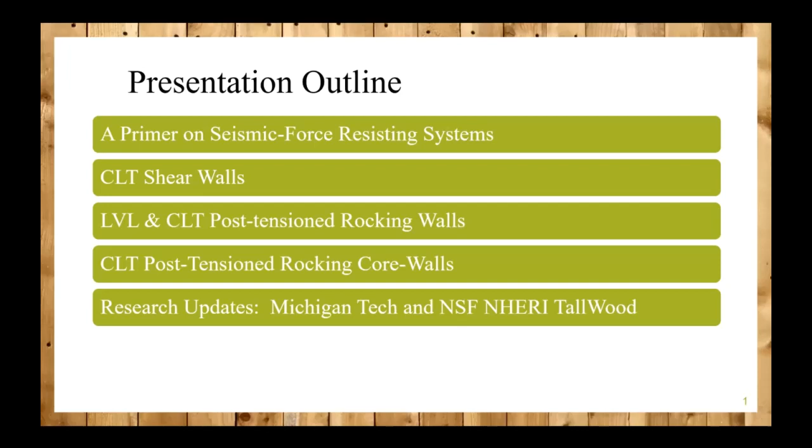The one thing I want to quickly note is that essentially this information I'm going to present, other than the latter part, is a literature review of select research studies in the past 10 years or so in this field. So I'm going to be presenting work by others, and all the figures and data are taken directly from those studies.

As structural engineers, we need to design buildings for both gravity loads, which are vertical loads such as self-weight and live load, but we also need to design the building for lateral loads, which are wind and seismic loads.

To resist wind and earthquake loads, all buildings have to put in these lateral force resisting systems. Here the focus is designing for earthquakes, so we refer to these systems as seismic force resisting systems, although they resist wind loads too, and vice versa. For whatever reason, the code switched to calling these seismic force resisting systems and wind force resisting systems separately, but it's the same frame.

The main difference is that lateral force resisting systems are designed to remain essentially elastic, or with very little damage, for wind loads. But when it comes to designing for earthquakes, we design our systems for inelastic response or controlled damage.

If you take a look at the figure on the right, this I believe is the Kobe earthquake in the early 1990s, and what you see there is a building that's essentially on the verge of collapse. I think most people who aren't necessarily structural engineers don't really realize that this is a code compliant building in terms of designing for earthquakes.

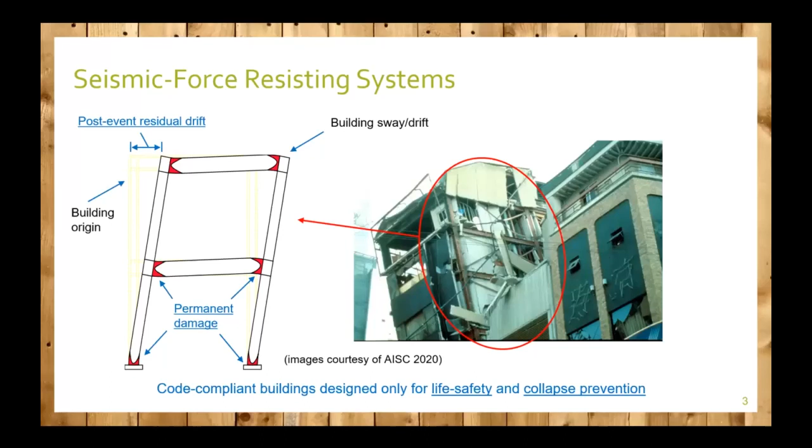The analogy that I really like to use is the crumple zone analogy for vehicles. All vehicles are designed with crumple zones, so if you're in a car accident, the body of the car dissipates all the energy through damage, so that way you can walk away from that accident. This car represents a building.

I'm showing the pre-earthquake condition, right? The earthquake comes along, and in this case I'm using a car analogy for a car accident, and you can see the damage that occurs. You can see the passenger in the driving area looks pretty safe, I bet the people who were driving this were able to walk away safely. So this is life safety.

This is how seismic force resisting systems are conventionally designed in the current standards. As we talk about CLT systems, one of the systems is CLT shear walls I'm going to talk about, and this is what CLT shear walls are designed for, to get to the point where you get to this damaged car where people can leave.

Now there's been a surge in approach and how we design buildings in the last 10 years, which is what if we can design buildings such that we can easily repair them, that they're no longer disposable, that after the event the building will recenter on its own and we can easily repair the damage. This is where seismically resilient seismic force resisting systems come into play, and this is related to CLT post-tension rocking walls that I'll talk about.

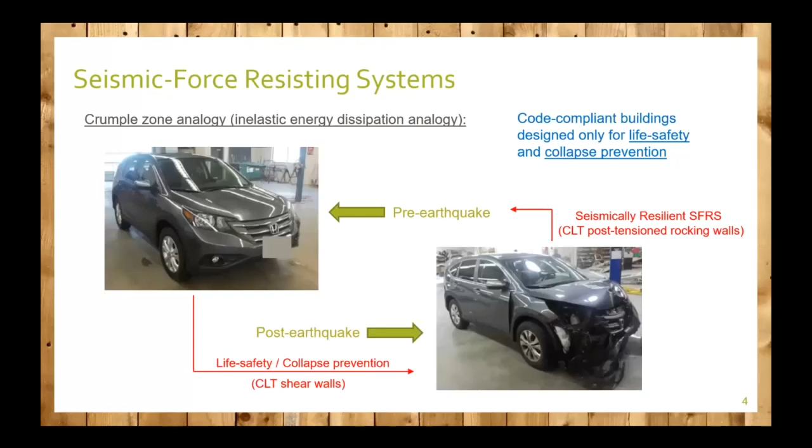So a little bit more technical discussion on how we design for buildings. If we consider the generic building shown on the right, with lateral loads on it, and push on that building until collapse, the building response can be represented by a pushover curve shown in the left-hand figure. The vertical axis represents the increasing pushing force, and the horizontal axis represents the corresponding lateral building displacement.

From the pushover curve, we can extract three different parameters: the R factor, a response modification factor; C sub D, a deflection amplification factor; and omega naught, an overstrength factor. These are referred to as seismic performance factors, and to design any seismic force resisting system, these three parameters have to be known.

If you take a look at the graph, I've highlighted a portion of this pushover curve at the beginning where it's straight. This is an elastic response, meaning the building or lateral frames have not been damaged. So if you push on a building in the elastic region, the response is recoverable—it will always go back to its center. Just like a spring: you pull on it and let go, it goes back to its original position. That's elastic response.

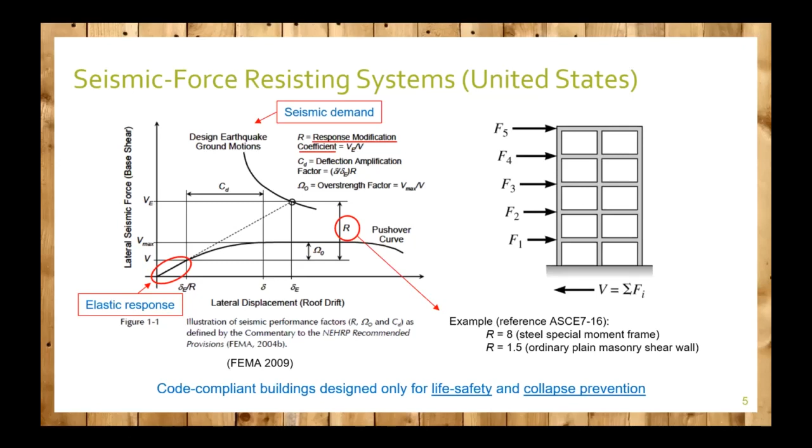Okay, I apologize for that—went a little long there, but think about this R factor, keep that in mind. So how do we calculate our forces?

The first step is to determine what the design earthquake forces are. This is typically done using the equivalent lateral force procedure prescribed in ASCE 7. This is a static force-based method that in most cases circumvents the need for conducting dynamic response history analyses, which requires running actual ground motions on numerical models, and is highly computationally intensive.

Typically, those kind of high-end analyses are for atypical structures, but even if you had that condition and had to run the nonlinear response history analysis, you still have to run an ELF to design the member forces. And the reason why I showed this is how we calculate the forces.

The base shear V equals C sub S, the seismic response coefficient, multiplied by the weight. Looking at the equation for C sub S, the S term up top is acceleration, divided by an R term. In most cases, I sub E, the importance factor, is just 1. So what's happening is you're dividing the acceleration demand by the R factor. The R factor is found in a table, and an engineer can go in there and pick these factors for a particular type of system.

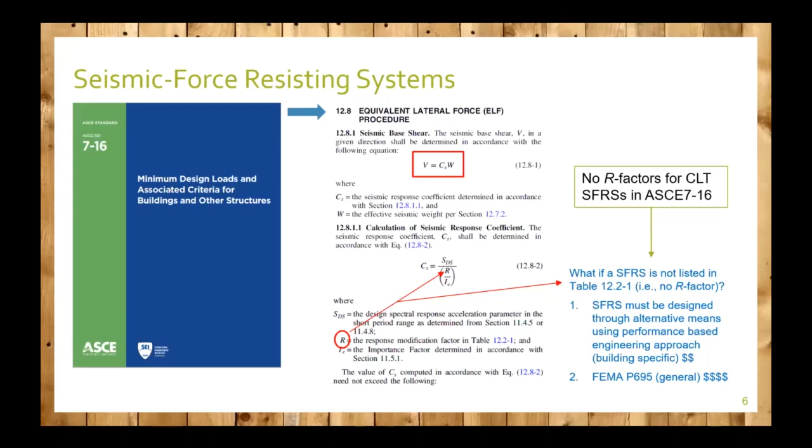So wouldn't it be great if we could have a 100% mass timber building? That's the focus of where this presentation is going: CLT shear walls.

Here's a great figure taken from a CLT panel. Basically, if you have a panel and put a lateral load on it, there are 4 distinct components that add to the total overall deformation of that wall during an earthquake. The first is rocking, where essentially the panel is a rigid block that just rocks. The second, shown in figure B, is sliding. The third and fourth are shear deformations and flexural bending deformations.

Because CLT panels are so stiff, the dominant response is rocking and sliding, and shear and bending deformations are essentially negligible. Because these panels are so rigid and stiff and strong, they essentially remain elastic if you put a lateral load on them, largely because they rock and slide while remaining rigid elements.

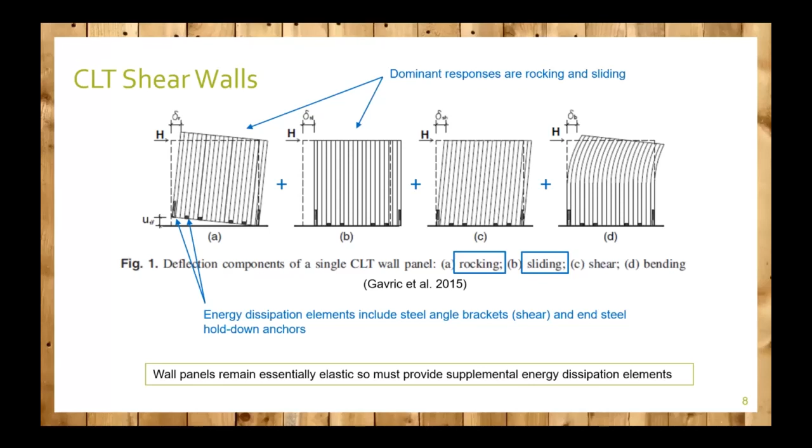So here's a video, and there we go. This shows you a test.

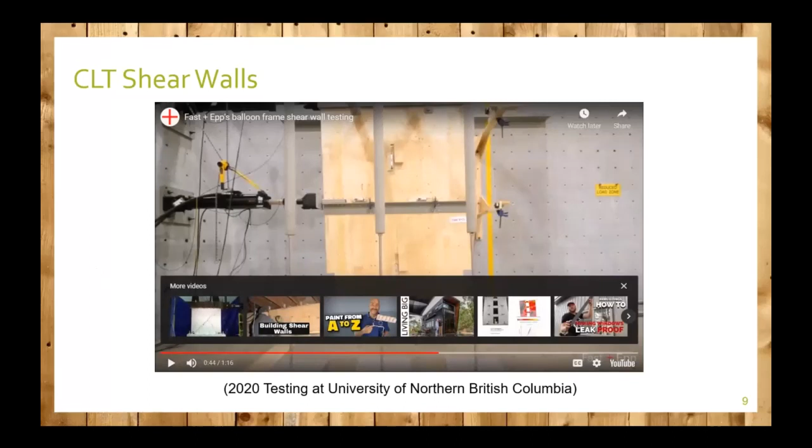This is a recent test at University of Northern British Columbia, where they're testing a two-story CLT shear wall. You can see actuators at 2 levels, and this panel is also what we call a coupled wall, meaning it's not one solid panel. There are actually 2 panels - you can see the relative sliding in between. So this is a coupled wall, with a splice in between.

What I wanted to point out is you can see the energy dissipation devices that are provided - there's the shear angles, the small ones near the middle, and there's the hold down uplift anchorages at the ends. Even though this is a CLT shear wall, you can clearly see that it's really a rocking wall, because that's what it wants to do - these walls are so stiff.

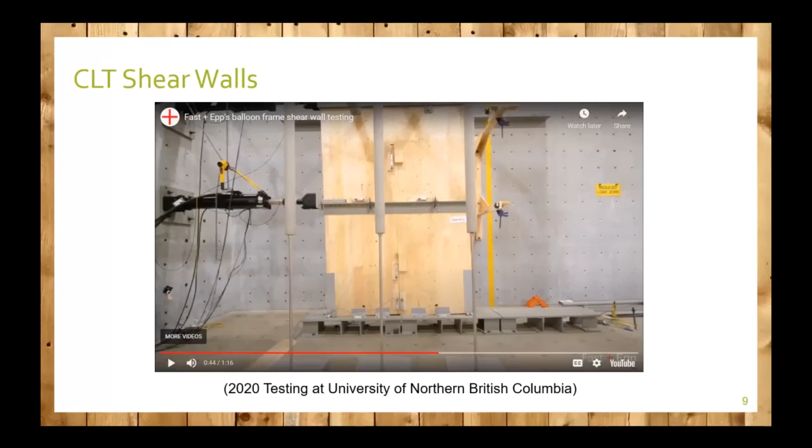Moving on to some of these studies, one of the first comprehensive testing programs of CLT shear walls in North America was conducted by FP Innovations out of Vancouver, BC. These experiments were quasi-static cyclic tests, and you can see the test setup shown there in what looks to be a Revit model.

Quasi-static simply means these are constant low velocity tests. Constant velocity meaning there are no inertial effects that would affect the force displacement data. Slow velocity meaning typically these would be conducted at a velocity of like 1 inch per minute - really slow. In the video we just saw, you could see it was sped up quite a bit to get that faster moving video.

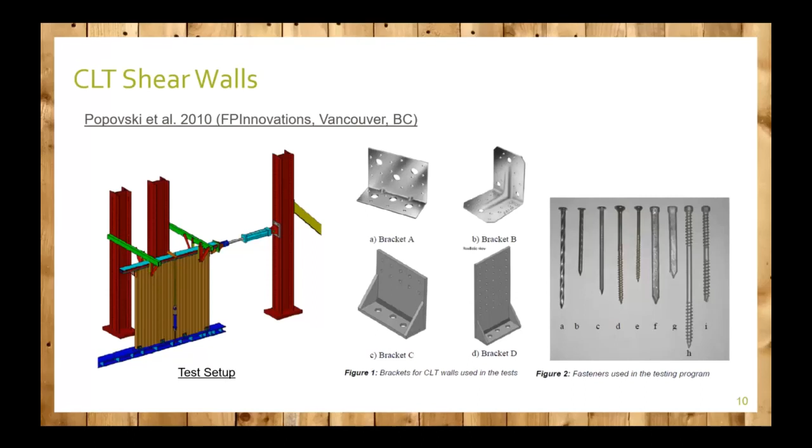So the brackets - they were investigating the brackets as one of their parameters, and they were also looking at using different fasteners. They've got some self-tapping screws, nails, and so this was the test program. Here's the test matrix that they tested.

They had 12 walls in total, with different aspect ratios. If you take a look on the left-hand side, they had 3 walls with an aspect ratio of 11.3 feet long, 7.5 feet high. So these would be squat walls.

Next to that is a table with 2 walls, which were tall walls - these would be considered slender CLT shear walls. Finally on the right-hand side, they did a series of panel tests that were square, so this would be kind of a mixed panel ratio in between squat and tall.

You can see that they had different fasteners, used different quasi-static loading protocols, and if you look at some of the test panels - for example on the far left-hand side, the middle one, IX number 9 - you can see these vertical stripes.

Those are splices. So similar to the video we just watched, this particular panel consists of 3 different panels spliced together with a spline. So really, that test specimen IX is really a slender wall, because the individual walls don't work compositely - they actually work independent of each other.

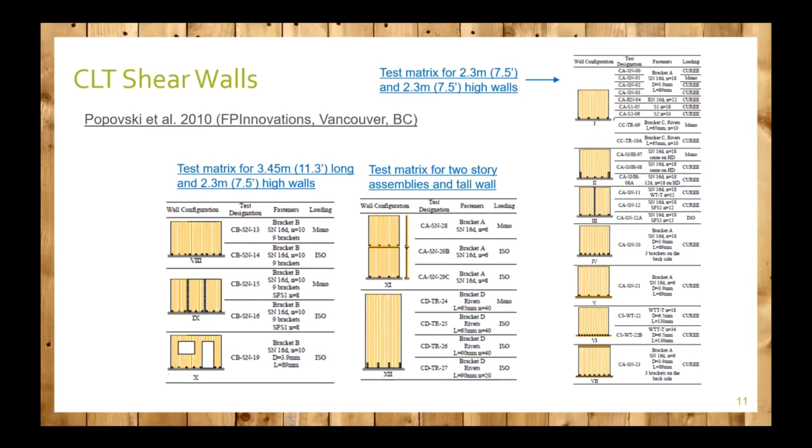They also had different combinations of shear brackets and hold down anchors. Here's some results from some of their tests, and I selected 2 tests. The first one on the left-hand side is a square panel, using 4 of those bracket type A's.

You can see the damage modes of these angles shown in figure 8. You might look at that and say, whoa, that looks terrible - so much damage - but that's what we want, and that's how we want those angles to behave. Energy dissipation is caused by yielding controlled damage of those angles and yielding and pull out of the nails - that's where all the energy dissipation is coming from. There's some minor energy contribution from the wall, some crushing at the toes and things like that, but that's insignificant compared to energy dissipation provided by these yielding elements.

If you take a look at that force displacement response, you can notice that it kind of pinches - meaning towards the 0,0 point on the plot, it actually pinches, looks like a bow tie, I guess. But this response is actually characteristic of a rocking response.

A rocking response is actually a natural self-centering mechanism. If you think about old Greek structures, the big columns and pillars, they're still standing today, even with the high seismicity over there. So why are they still standing? Well, in part, largely it has to do because those columns are not fixed to the ground - they're allowed to rock, and if something rocks, it'll naturally want to self-center under its own weight.

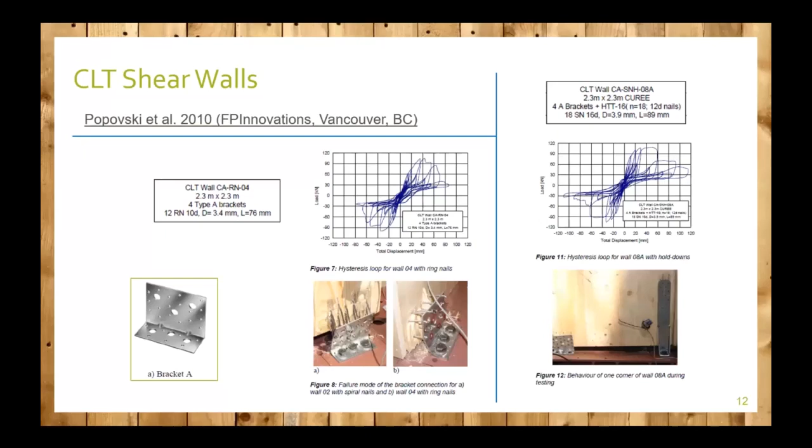So that's what you're seeing here is there's a bit of a pinching effect due to rocking, which is a natural self-centering. And then on the right-hand side, it's essentially the same wall panel, but they used hold downs on the ends. You can see on the uplift as the wall is rocking, there's some additional energy dissipation and strength provided by those hold downs at the ends.

Another comprehensive CLT shear wall testing program was conducted by Gavric et al. in 2015, a study by researchers in Italy. Their setup was pretty similar to what we just saw with FP Innovations, using similar shear angle brackets, but they're using different hold downs and some different fasteners, self-tapping screws and fully threaded screws.

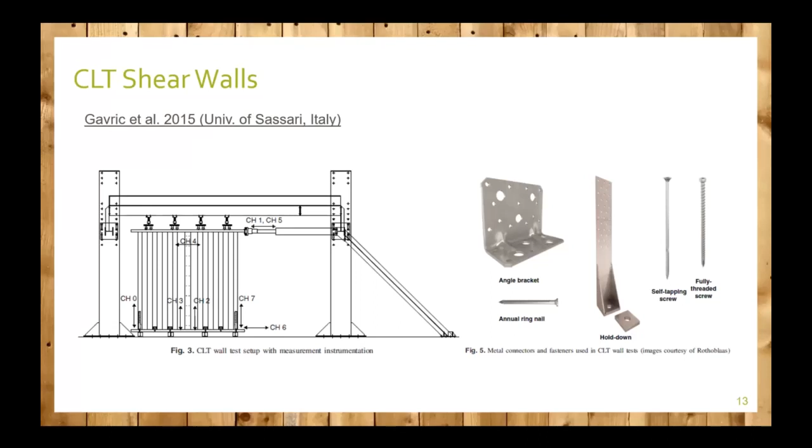Here's their test matrix on the right-hand side. The wall panels are single wall panels, shown on the left. The first one is a single wall panel. The second one is a coupled wall—even though it looks like a single wall, it's actually two walls tied together with a half lap joint, as shown there. The third one is also a coupled wall system, but instead of using the half lap joint, they're using a spline joint, an LVL strip of wood nailed.

One of the big differences in this testing program is they included vertical load on their loading. So not only are they pushing it laterally with an actuator, they're also simulating some gravity load on it. The number of hold downs changed, while the number of angle brackets remained constant except for the very first test, which had 2 versus 4. The number of screws in the vertical joints also varied, and you can see that information there.

What I want to point out before moving to the next slide is that very first test, I.1, had 2 angle brackets, whereas everywhere else there's 4. So just make a note of that as we go to this next slide.

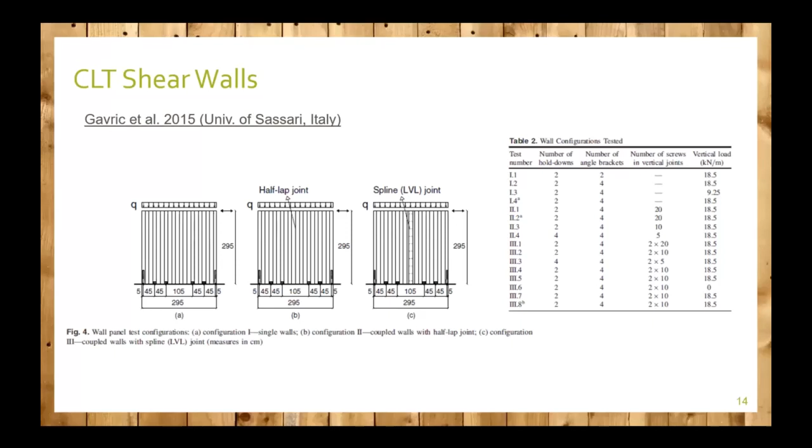So here's some results. These researchers, and I really appreciated what they did, in table 4 for each test, quantified the deformation from the different components of deformation shown in that slide I presented earlier—there's a rocking component, sliding, and shear and bending.

If you look at that very first test, on the far right-hand side they have the type of kinematic behavior. The first test was essentially sliding dominated. You can see the photos on the left-hand side in figure 7A, showing that arrow indicating literally how far that wall slid. I think that largely had to do with an inadequate number of angles—this was their first test. After that, they realized they needed to add more shear angles, so they went to 4 on each wall.

Moving on, depending on the predominant deformation shown on the far right side, the first one was driven by sliding, then there was rocking and sliding, and the latter specimens were all dominated by rocking. That's expected because those were coupled walls, meaning the individual walls that make up the full panel are very slender and tend to rock. Looking at the percentages under rocking and sliding columns, for example the very last test, 3.8, 90% of the deformation came from rocking, 9.4% from sliding, and 1.4% attributed to shear and bending deformation. Shear and bending deformation across all columns is essentially negligible.

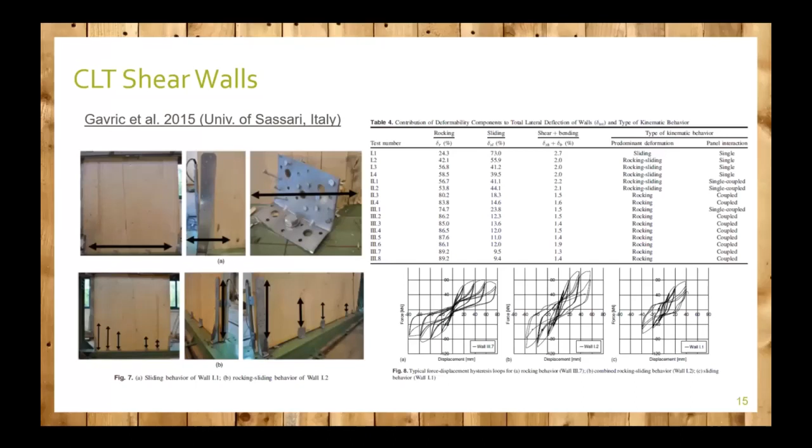Perhaps one of the most well-known CLT shear wall testing programs is the 7-story full-scale shake table test of the SOFIE project. This was an Italy-Japan collaboration, and they had a bunch of quasi-static sub-assemblage tests within the SOFIE project.

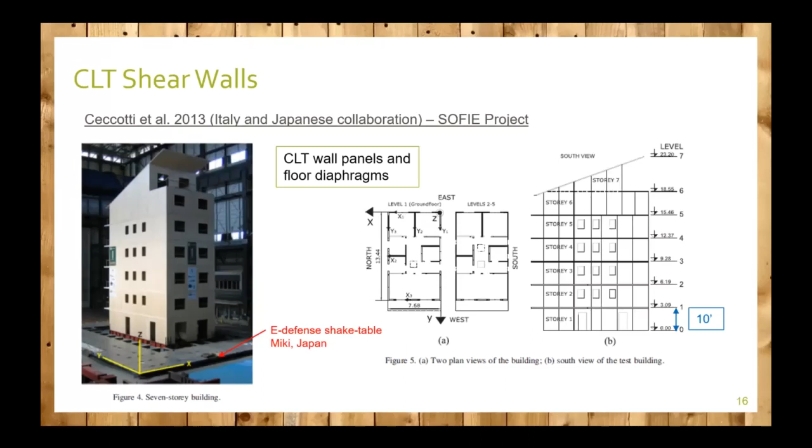They finished it off with this benchmark test done at E-Defense Shake Table, the largest shake table in the world in Japan. This was a full-scale, I guess you could call it a 7-story building, and it's all CLT - CLT wall panels, CLT diaphragms, CLT interior walls. You can see the plans on the right-hand side. Story floor levels were about 10 feet high, and they used typical hold-down connections. Wall-to-wall panels used self-tapping screws - this is common CLT construction.

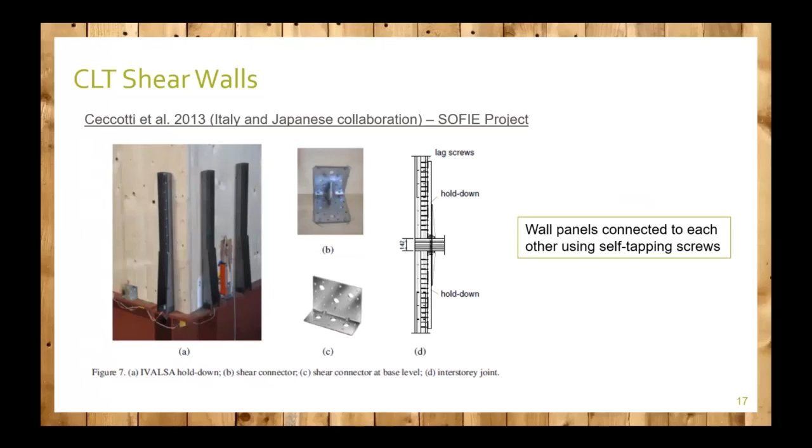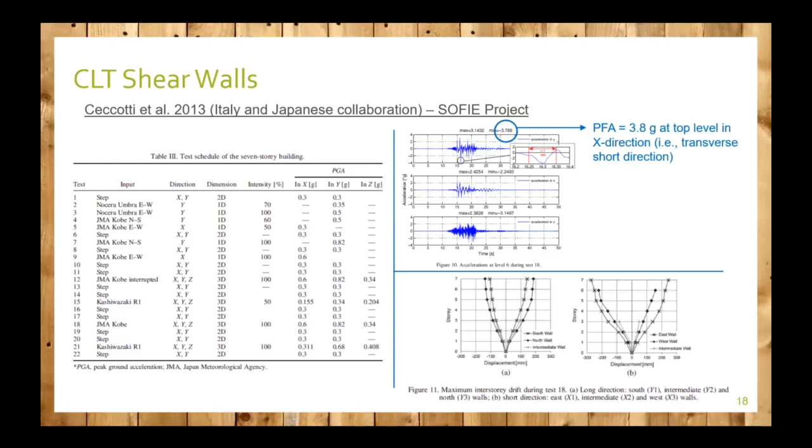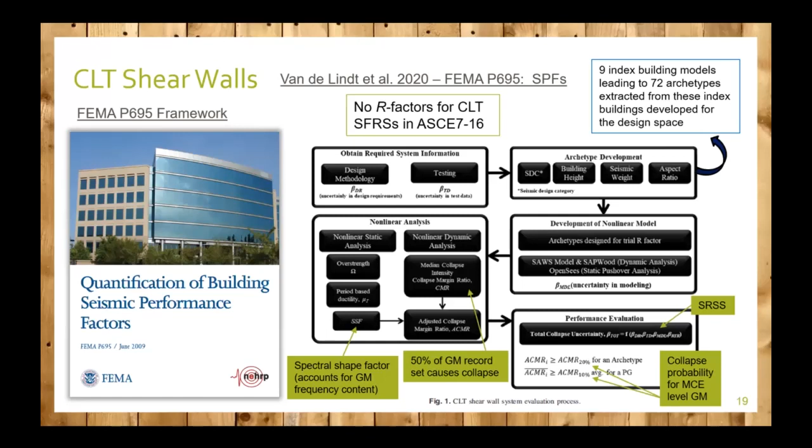I see I'm getting close to ending, so the point being is they had 72 archetype buildings. They ran nonlinear simulations and determined, through a probabilistic framework, what these R factors are.

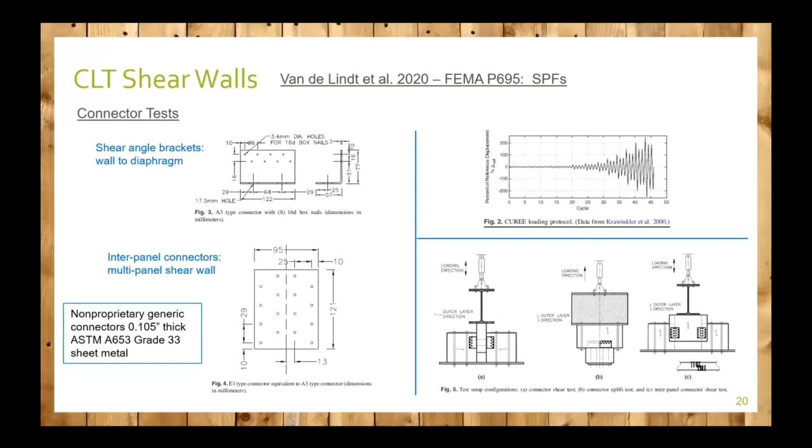As part of the P695 testing, they have to calibrate the numerical models. They did that by doing connector tests - on the shear angle brackets, and on the lower right-hand side, uplift connector shear tests. They did in-plane shear tests of the connector, and then inter-panel connector shear tests. They did these along with panel tests on many different parameters, in order to calibrate the numerical models before running all the numerical simulations.

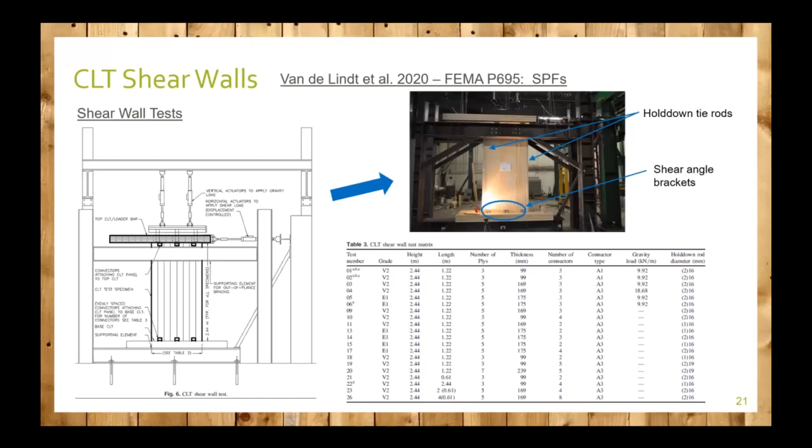The big takeaway here is that they used hold-down tie rods instead of hold-downs at the ends for uplift, and they used these shear angle brackets.

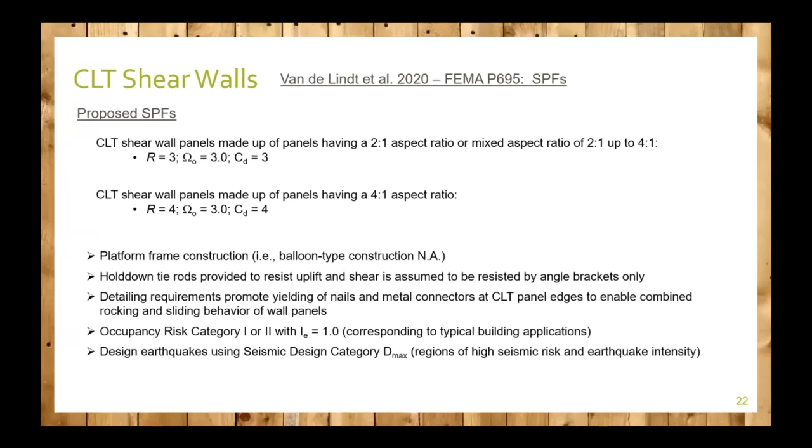These SPFs were developed for high seismic regions, or seismic design category D-max, the regions of high seismic risk - which means for regions of low seismic risk, you can use these systems because they envelope the response using the worst case seismic hazard level. These proposed SPFs are expected to be included in ASCE 7-22, available sometime next summer. It's expected that IBC 2024, the International Building Code, will include these by reference to ASCE 7-22.

The design requirements for strength, stiffness, and details are to be in the American Wood Council Special Design Provisions for Wind and Seismic document, the 2021 document, which will be referenced in the IBC 2021. This references the current ASCE 7. So for jurisdictions using the 2021 IBC and the SDPWS 2021, officially the SPFs are not available. However, it's likely that local building jurisdictions will allow the use of ASCE 7-22 as soon as it becomes available, so people can implement CLT shear wall systems.

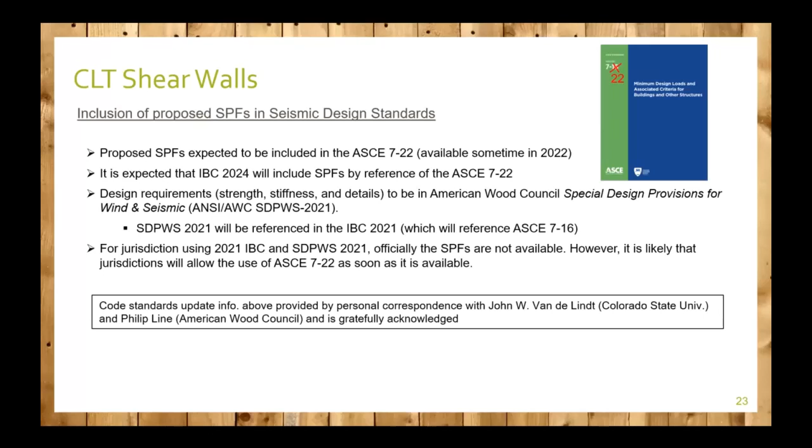Now we're moving to rocking wall systems. These, as I mentioned earlier, are seismically resilient systems for the reasons I noted earlier. The only difference is that we have our CLT wall, we add post-tensioning, we eliminate the hold-downs and the angled shear brackets, and we provide some sort of idealized roller support, but provide some sort of horizontal restraint there to resist the base shear. This leverages the natural kinematics of the CLT wall, so we're allowing the wall to rock freely.

So we have to provide supplemental energy dissipating elements, and we do that by providing what we call structural fuses. Because this system is decoupled from the gravity framing system, we can easily go in and repair these structural fuses. When I say decoupled, I mean that if you take these walls out of a building, the building can still support its gravity loads. It's still stable, it's decoupled. So this provides an opportunity to provide a system that can recenter, with energy dissipating elements that are easily replaceable.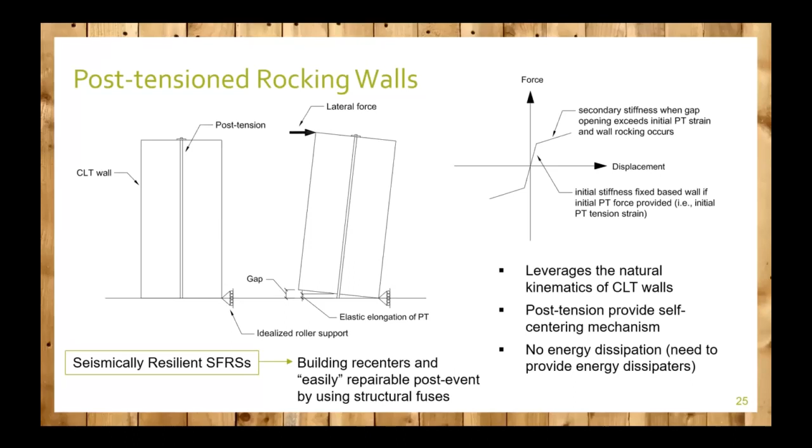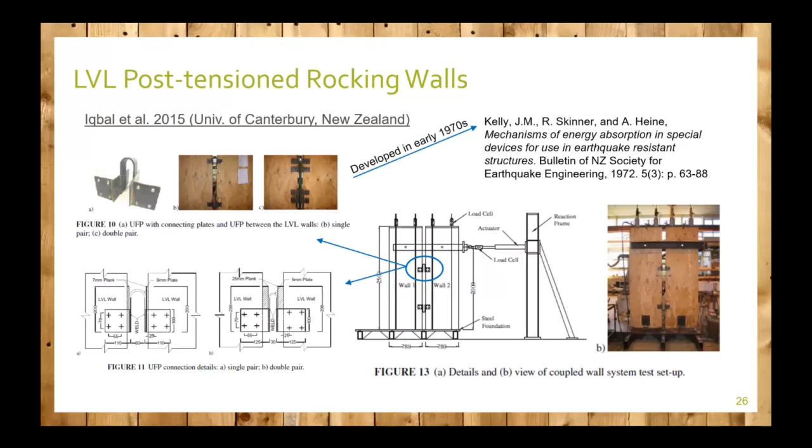So here are some studies, a lot of these came out of New Zealand. Here's a coupled rocking wall, and you can see on the figure on the right-hand side the post-tensioning. The energy dissipation they selected to use are these U-flexural plates, called UFPs. As the wall rocks, these U plates deform in bending as the walls move along their adjacent planes. I have to note that these UFPs were developed in the 1970s, so they've been resurrected, so to speak, in these rocking wall systems.

So for this system, the loading protocol is shown on the left. They did both quasi-static testing, that's the sawtooth sine displacement you see, and they also did pseudodynamic testing. You can see the ground motions they use, which is basically emulating a closed loop system where they're solving the equations of motion, emulating a dynamic shake table test in a quasi-static fashion. So they had different parameters.

They're looking at different recentering ratios on the far right-hand side. You can see that's all dependent on how much restoring force the PT provides compared to how much inelastic energy dissipation is provided by the UFPs. Anything above 1 in this particular table provides full recentering.

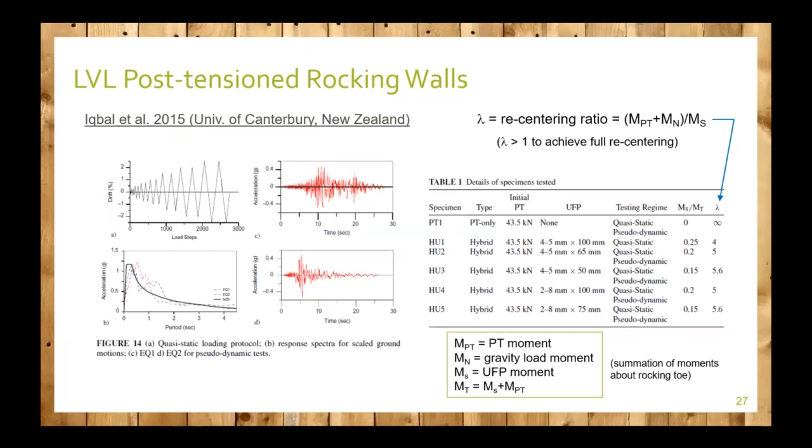So here's the response. On the left-hand side, you can see some pictures of the UFP plates in bending. The force displacement plots are shown on the right, and you can see the flag-shaped characteristic we see in recentering systems. In red, that's the wall with no UFPs, only the PT, and you can see it's bilinear elastic, with no energy dissipation.

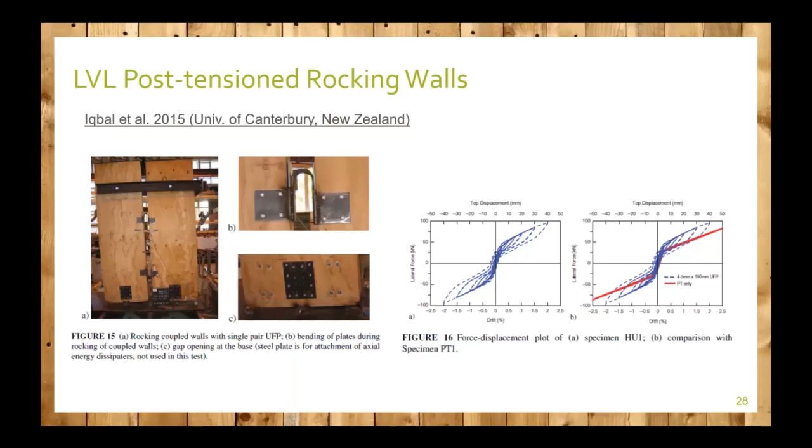Another study was conducted by Sarti in New Zealand. He used a very similar system, but instead of coupled walls, he had a single wall coupled with some boundary columns, but he's using these UFPs as well. I want to make a note of this concept - this is what the NHERI TallWood team have used for their tests.

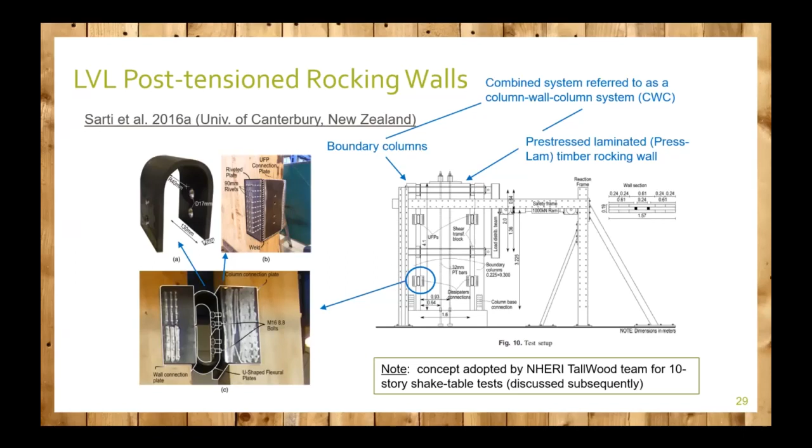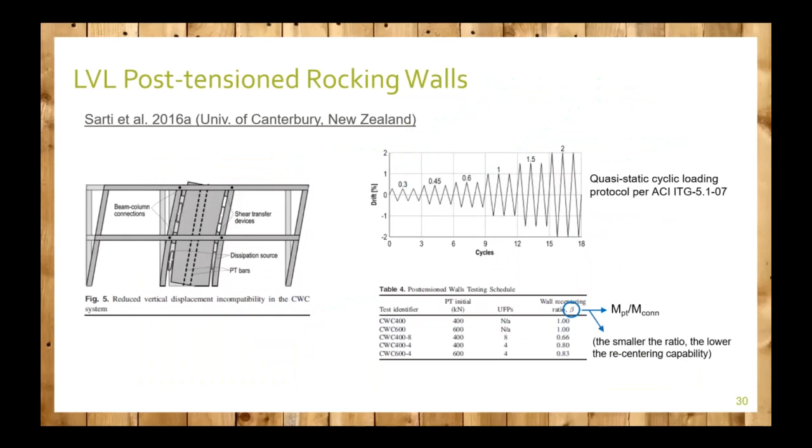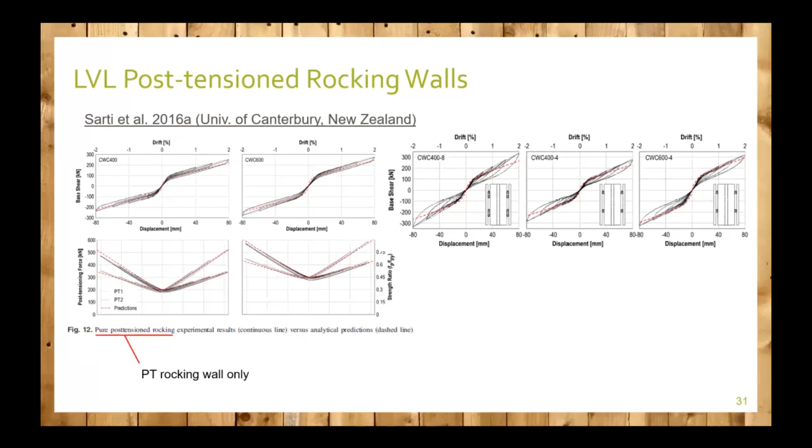There's the loading protocol, and again the testing matrix. On the far left-hand side shows the kinematic response of the system. Finally, here's some force displacement response. On the left-hand side, you see the PT only with no UFPs - you do see some hysteresis loops there, due to some wood crushing and friction. But on the right-hand side with the UFPs, you can see the larger loops, which represent energy dissipation. And of course, you can see that these systems are fully recentering.

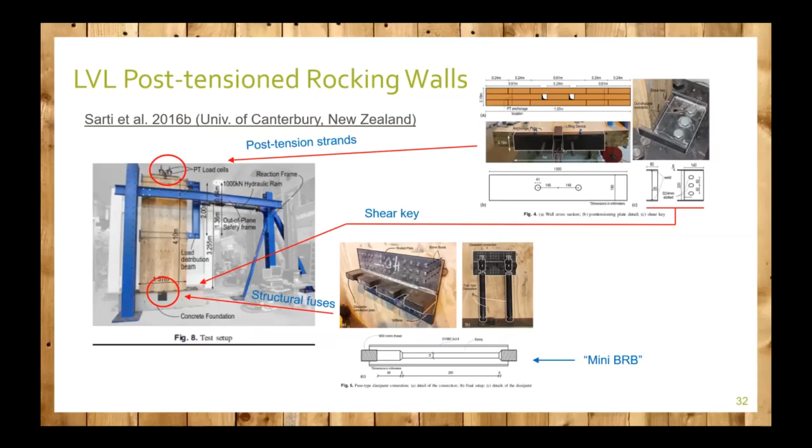Another system variation that Sarti did was, instead of using those UFPs, he had little mini BRBs at the base of the wall. As the wall rocks, these little mini yielding devices dissipate the energy. There's also a shear key in front of the walls to resist the in-plane movement of the wall.

Here are some responses, highlighted on test S400-8. Looking at that loop, it actually has not fully recentered as they were expecting, recording a residual drift of 0.6%. This had to do with the yielding elements having some overstrength due to strain hardening that wasn't accounted for. When something yields you get permanent deformation, and those BRBs prevented the wall from fully recentering. Recentering is typically assumed achieved when you have a residual drift of 0.2%.

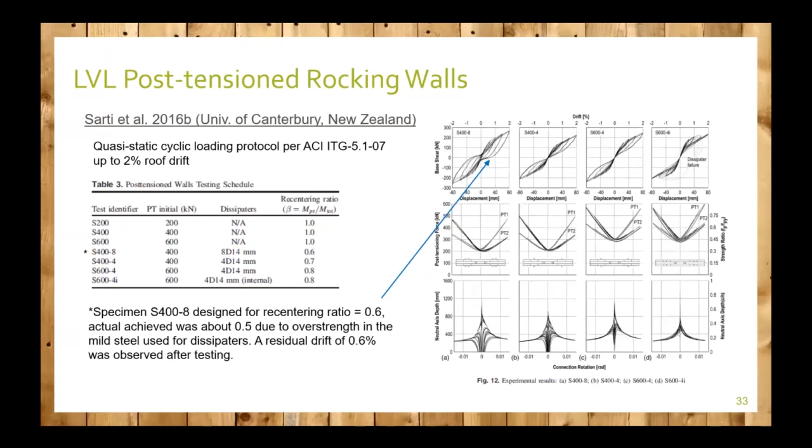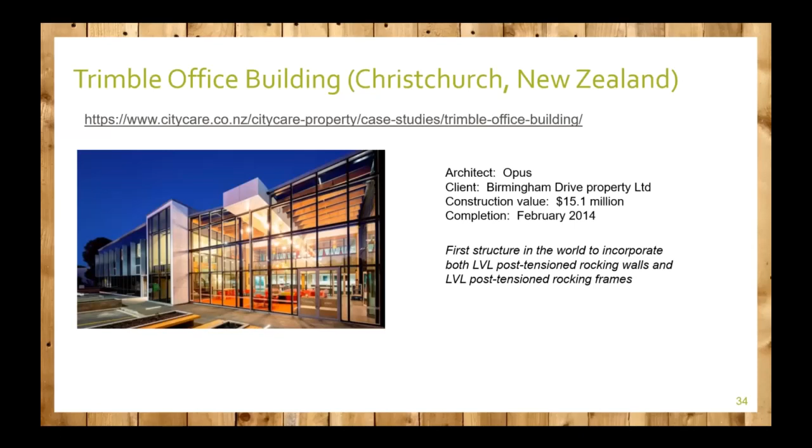Some applications: this is a Trimble office building in New Zealand, the first structure in the world to incorporate both LVL post-tension rocking walls and LVL post-tension rocking frames, opened in 2014. You can see the connections, which should look familiar. It's a rocking wall—lower left is a rocking wall, and in that glass is the post-tensioning. On the bottom you see those little BRB energy dissipators.

On the lower right figure, they actually have a frame using those devices. It's kind of cool that they left these exposed in the building to highlight and embrace the seismic resiliency methodology. It also allows that if another earthquake comes along, a contractor can come in and easily repair those energy devices.

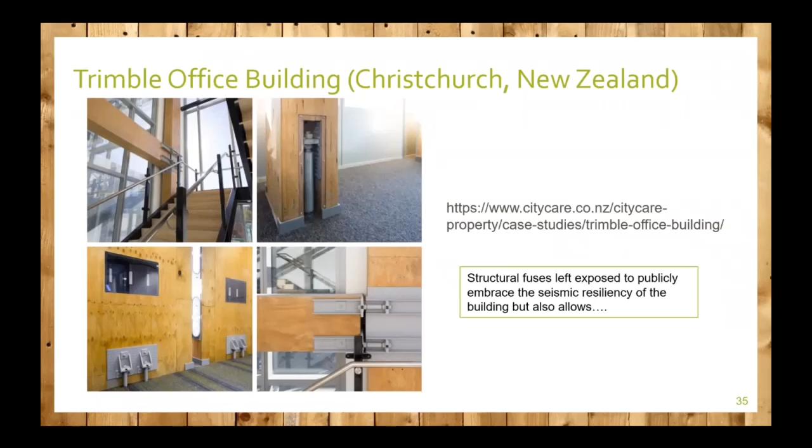The NHERI TallWood project is an NSF-funded research effort to develop and validate a resilience-based seismic design methodology for tall mass timber buildings. The project started in 2016 and will end in 2022. It's a collaborative research project led by PI Shiling Pei out of Colorado School of Mines.

This is one of the tests they did in 2017, a full-scale two-story test, all mass timber, CLT rocking walls. This was for an MCE level earthquake, which is a 2% in 50-year probability earthquake, occurring about once every 2,500 years—so a very rare earthquake event.

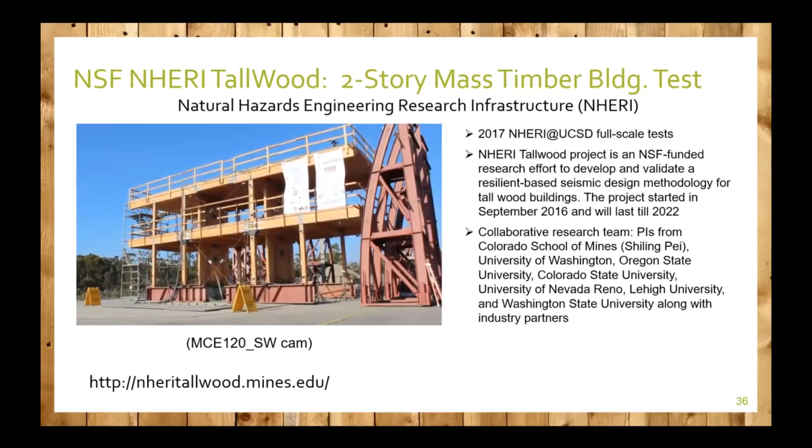That was it, but let's move to the next slide—this is the same test. Looking at the wall again, it's a resilient system: everything that gets damaged, the yielding devices, can be repaired after the event. The building recentered perfectly, so this was a proof of concept in 2017.

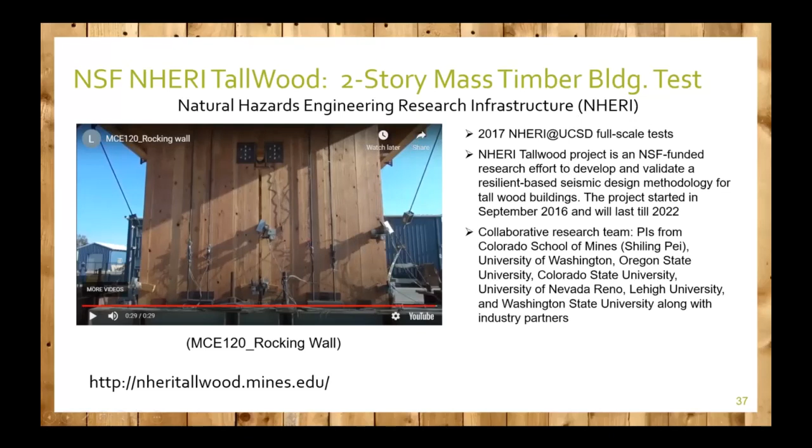To end the NHERI TallWood project, the team is planning a 10-story full-scale test at the same UCSD site next summer. This will be the world's largest wood building test at full scale, with 4 post-tension rocking walls, 2 in each direction—2 CLT and 2 mass plywood panels (MPP). There's a picture of the connection detail they'll use with UFPs and glulam boundary columns, very similar to what Sarti did in an earlier slide.

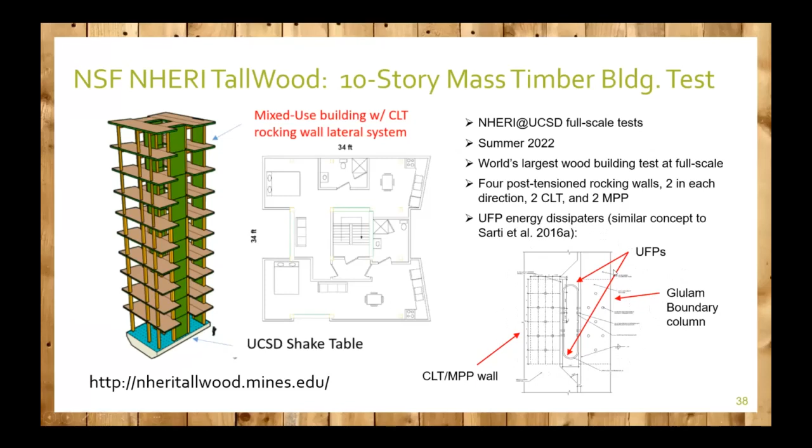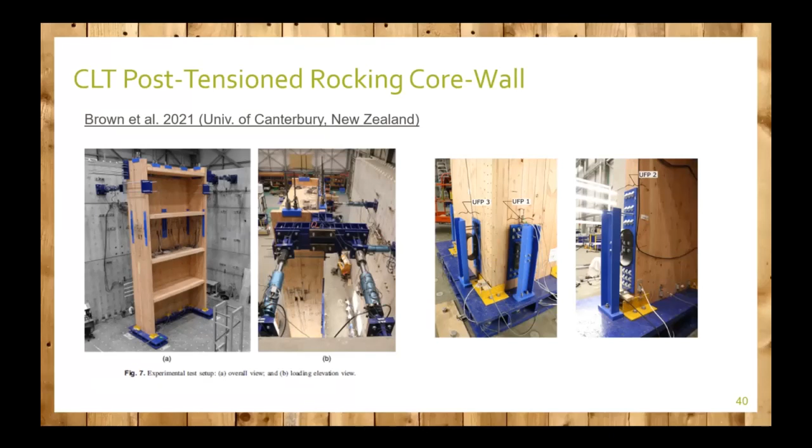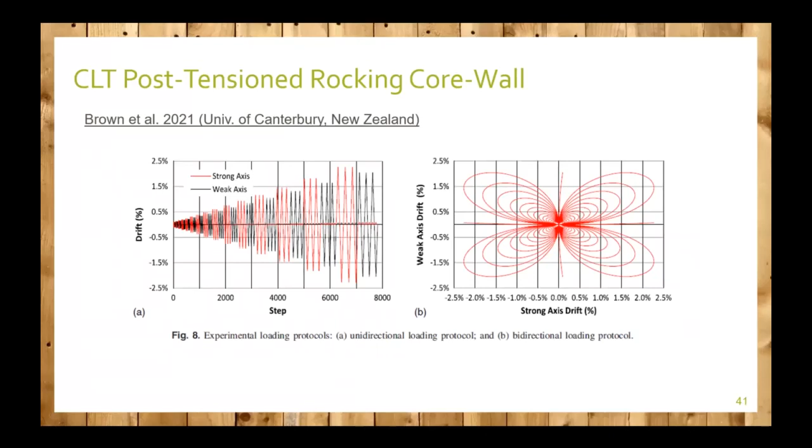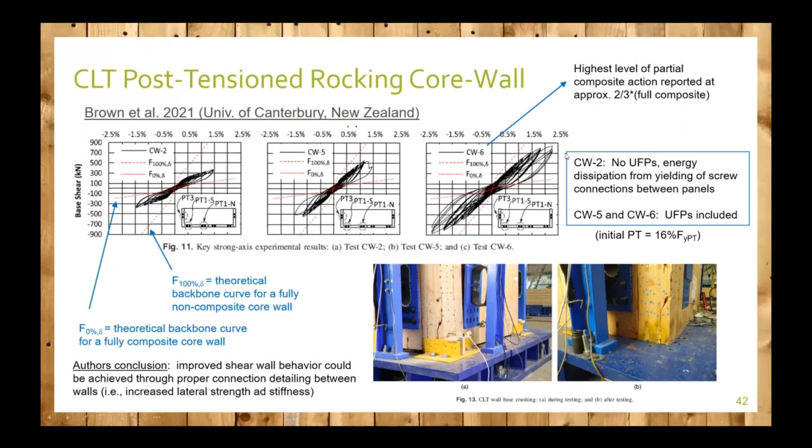So I'm quickly running out of time, so I apologize, but really quickly, I'm developing, along with my PhD student, an uplift friction damper for CLT post-tension rocking walls. And it looks something like this.

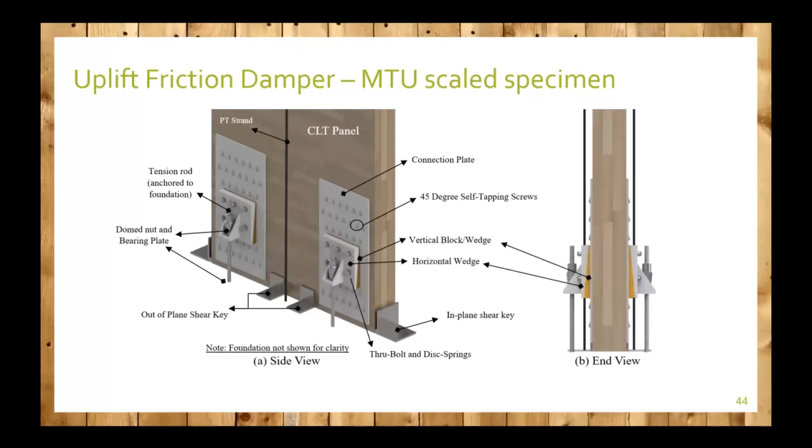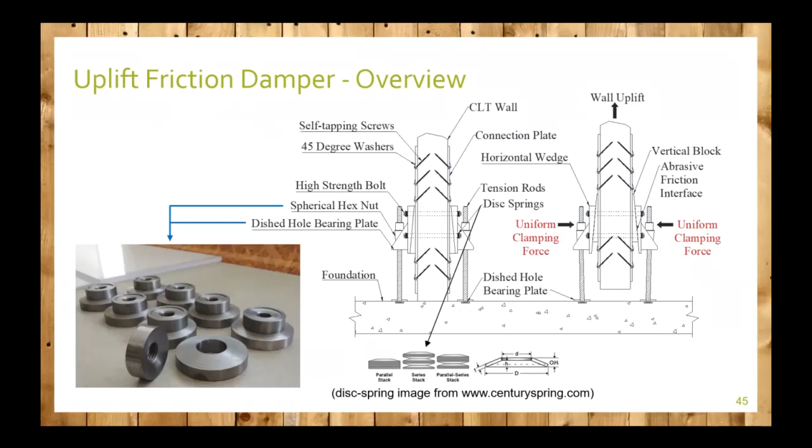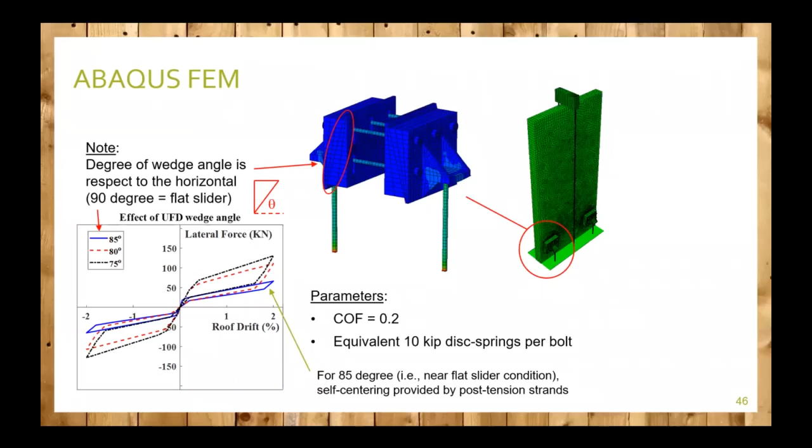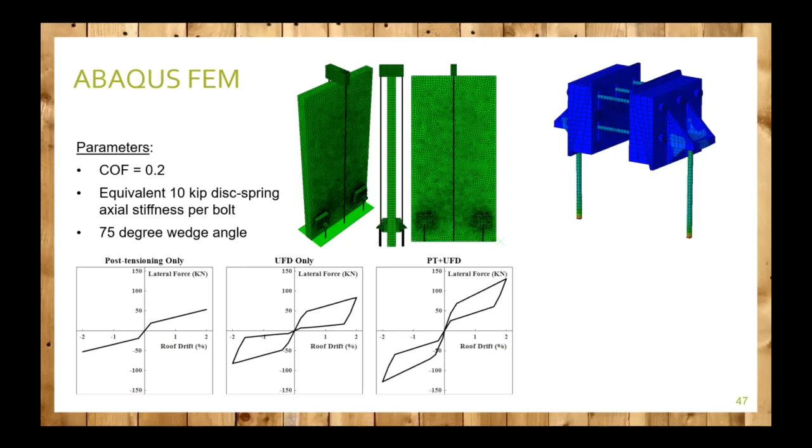If we look at one of the plots I just showed you, I can deaggregate the response of just the PT rocking wall and the response provided by the UFD. You can see that the UFD on its own does provide some self-centering as well. The combined response is on the right-hand side.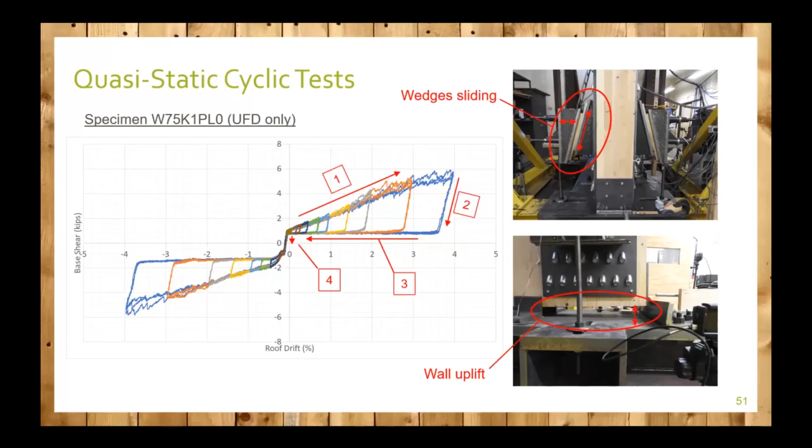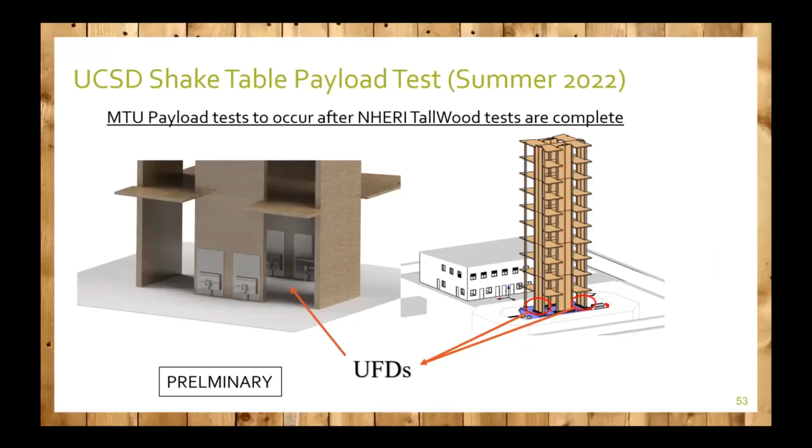Finally, I have a payload project with the NHERI team, and after they're done with their tests, we're going to come in and install our devices on these walls and run another series of tests. So I apologize for going over, but there's a few minutes.

Yep. That's okay, Daniel. We really appreciate the level of information and content you put within there for us. I am a professional forester, this was quite a range outside for me, but it was a great learning experience.